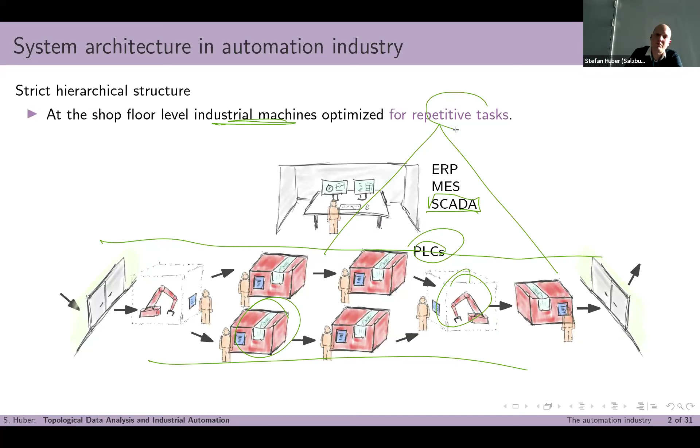I tell you this in order to draw a picture of the following situation: these industrial machines are very hierarchical and optimized for repetitive tasks. An injection molding machine, for instance, repeats itself in its operation to produce goods in the same way, in a cyclical sense. Highly repetitive.

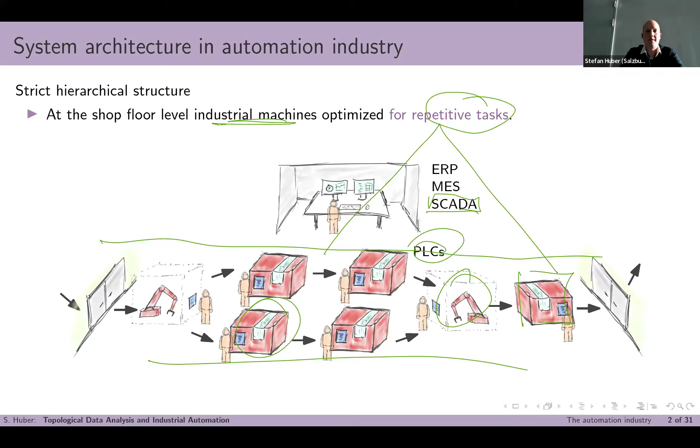In so-called discrete automation, as I explained, it's about repetitive processes. This is an old slide of mine now, 3 years old, always bring the same slide, which tells the following: if you consider the state of a machine, whatever that means to you, like 100 parameters describing what state the machine is in right now, let's call it the state vector.

If you consider the state space, which could be 100-dimensional or 1,000-dimensional, then the state performs an evolution over time, traces out a trajectory, the state space trajectory. And those are cyclic due to the repetitive nature of discrete automation processes.

Or at least in a certain subspace they are cyclic. That enables us, at least in principle, to record such a time series, such a trajectory over time, where you capture a couple of repetitions and then model it through machine learning - a statistical model, the distribution of state space trajectories. Those trajectories are then typically contained in some hose, might be narrower there and wider there, doesn't matter so much. This is sort of the hose of benign state space trajectories.

That leads, I would say at least at first, to 3 fields of application we're interested in. It leads to anomaly detection, which essentially means if you leave this hose of benign trajectories, this is an anomaly. Or maybe put more in a probabilistic sense, if you have a PDF density function of the distribution, then a low likelihood indicates an anomaly.

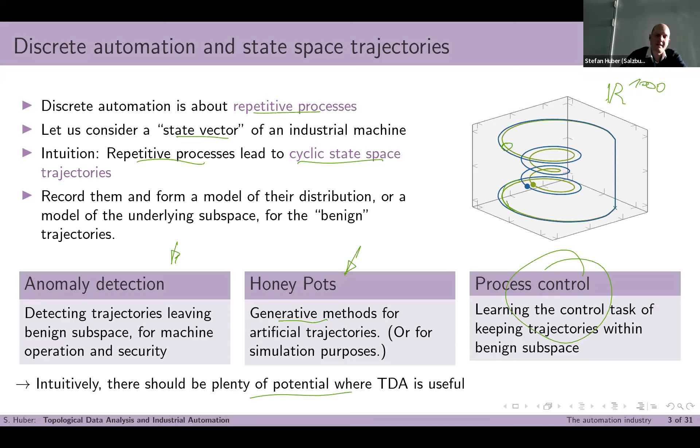So that's sort of the setting. This is what we did the past 2 years, 2.5, almost 3 years. Within this time we also built up a whole testbed, a realistic testbed of a production scenario. Here we have 3 such machines, which are injection molding machines, and 3 robots that take out the goods, put them on a conveyor belt, and a 4th robot palletizing them, and so on. And we implemented that with real hardware.

What's not real in our case are those machines, actually. So we simulate the thermodynamics, the material flow, other physical processes are simulated, but the controllers, the software, and so on, this is all real, and we use hardware-in-the-loop simulation for the physical processes.

That was quite some work by a couple of people in the last 2 years. And this was possible because we are a very interdisciplinary team and have very close cooperation partners, company partners, and it enabled us with software and so on.

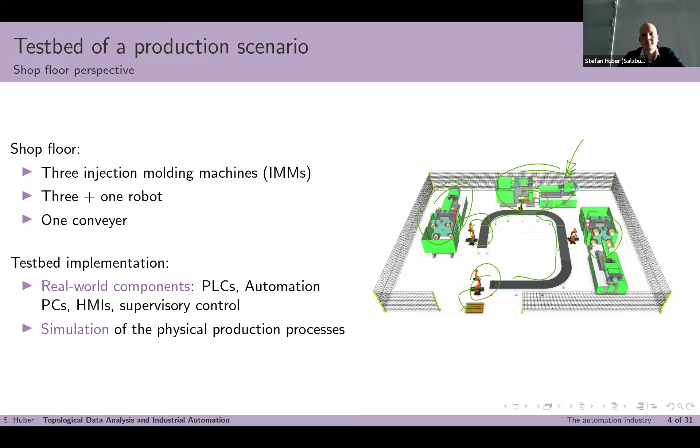So this is sort of the context I want to give you. Now the question is, are there TDA applications in manufacturing, or how do they look like?

To this end, we published a survey last year together with the group in Graz, Michael Kerber. Barbara was also part of this group back then; she later moved to the University of Albany. Martin is a PhD student in my research center. The title of this survey is TDA in Smart Manufacturing.

So what we did is the following: we performed a systematic, exhaustive literature review. We defined a set of keywords that captures what we call TDA, topological data analysis, UMAP, mapper, and persistent homology.

And we defined a set of keywords that sample the shape of industrial manufacturing. Today everything is smart, so we find a lot of literature on smart manufacturing, so you better add it to the keywords, like factory automation, operational technology, industry 4.0, and so on. So these are the keywords, the domain and the method side.

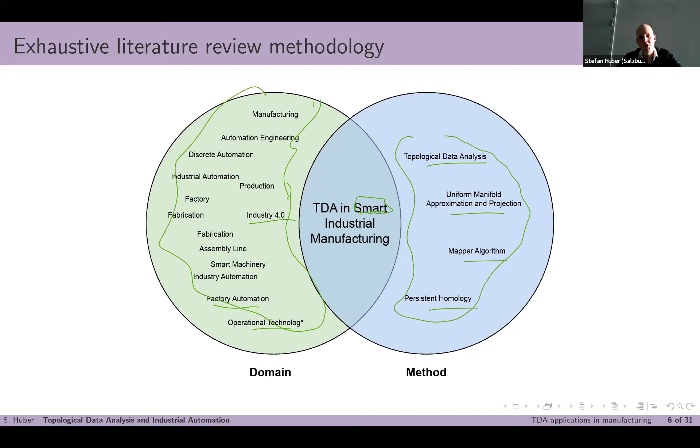The intersection sort of shapes TDA in smart industrial manufacturing. Then we formed search phrases of the form domain and method, plugging in domain keywords and method keywords in all combinations, and passed them through 5 search engines, ACM, IEEE, and so on. We got 7,000 results.

Those were then filtered, removing duplicates, only focusing on peer-reviewed journal and conference papers, only in English, only where full text is available, so we could dig into the material and check whether the context is actually right. That gave us 34 results at the end.

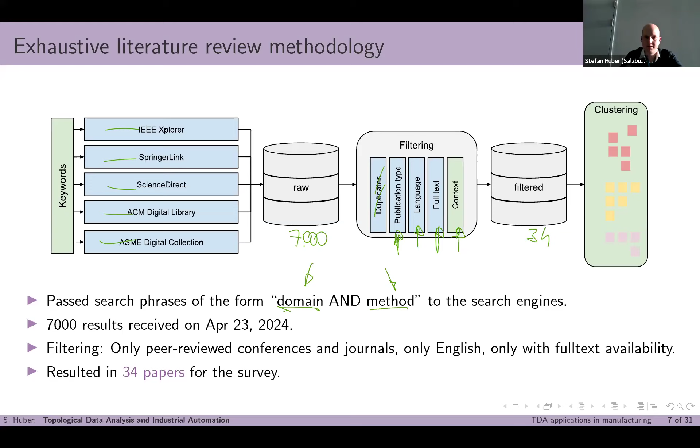With those results, we did some analysis. First of all, we found that they're arranged into 3 clusters. There is a first cluster, cluster A, about quality control on the product level. Here TDA is used to analyze deficiencies in the shape or the textures or the surface, something like this.

There's a next cluster about quality control on the process level - not the product that is produced, but the process that is producing the good. Like using it for detecting chatter in NC machining, so vibrations in the machine and stuff like this.

The third cluster is actually about manufacturing engineering - the engineering discipline that allows you to build machines, production lines, and processes. So about scheduling problems, process optimization, predictive maintenance, and stuff like this.

This was actually the largest cluster with 13 papers. Then there was quality control on the product level with 12 papers, and another cluster with 9 papers for product and process - no typo there.

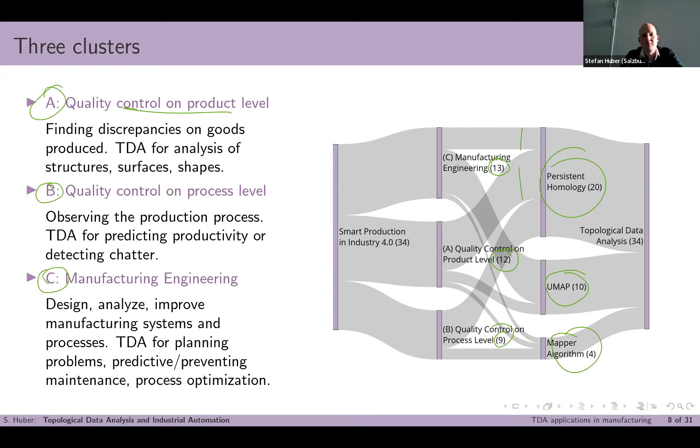Here we have our 3 methods - persistent homology, UMAP, and the mapper algorithm - and those are now related to the clusters. The thickness of the bar tells you how many papers there are. The largest method cluster was persistent homology. Okay, so far so good.

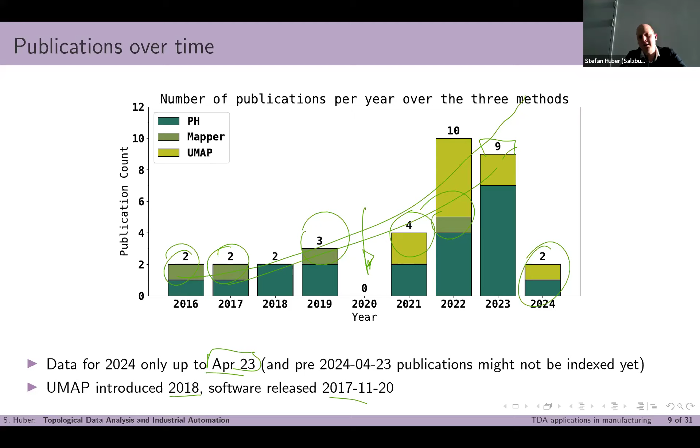We could speculate whether this is maybe due to patenting issues or what the reason might be - it's unclear. This is probably due to the COVID pandemic. Yeah, speculation. Another thing we looked at that I find interesting is the data on which those methods were applied.

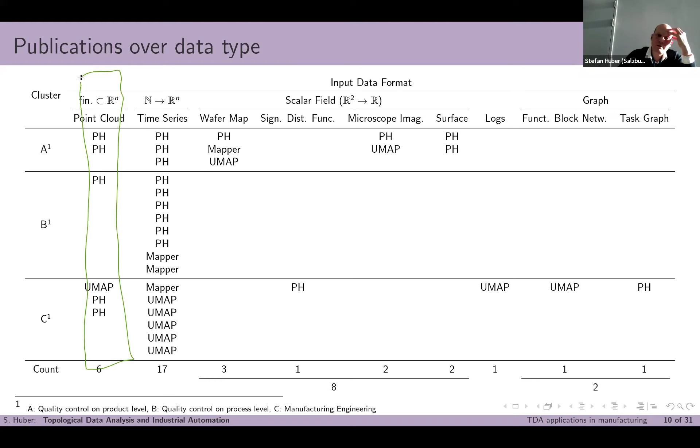This is to be read as follows: here is the column of point cloud applications, a finite subset of R^N. In cluster A, we have 2 works where persistent homology is applied to point clouds, and it's applied to a certain variety of data.

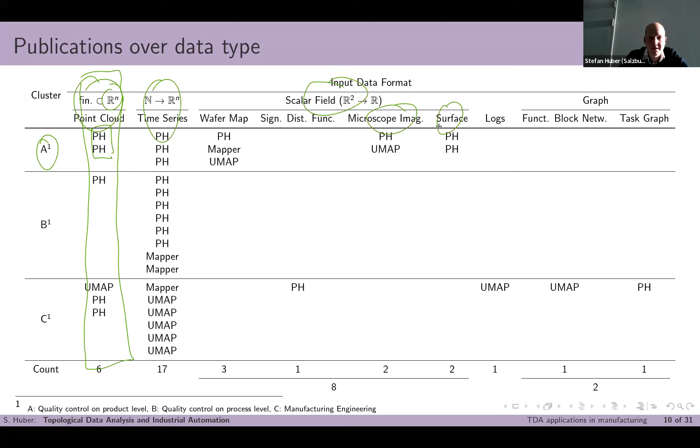So point clouds, time series, scalar fields in different forms, like microscope images of surfaces, or silicon wafer maps, something like this. 2 works where graphs are the underlying data, and 1 work where textual data, log books, log files were actually used with UMAP as the method.

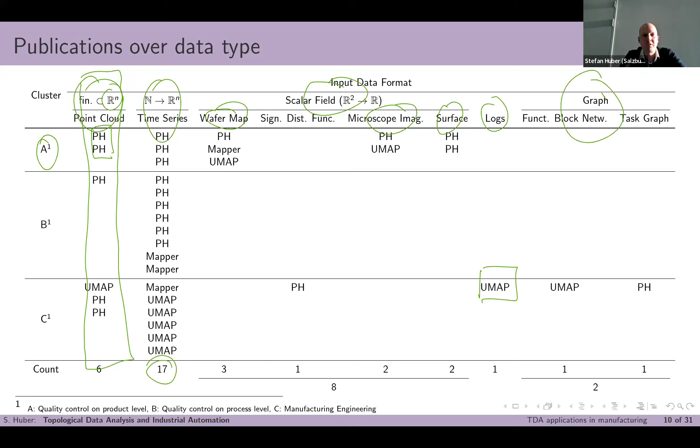So what we see here is 17 out of 34 works are concerned with time series - it's the most popular input data to TDA methods. Okay, so I don't want to dig too much into that and waste time here.

So a quick summary of this larger survey: the number of applications is quite low when you compare it to biology or medicine. Just go on the donut database by Barbara and so on, and you will quickly see that the number of applications there is much higher.

Secondly, the most prominent data type is time series, and there are a few other findings, like mapper is underrepresented. There's actually no UMAP application for quality control on the process level, which is probably a research gap here. Persistent homology and UMAP are used on a diversity of data types, but mapper only on time series, with 3 works, and 1 exception, scalar.

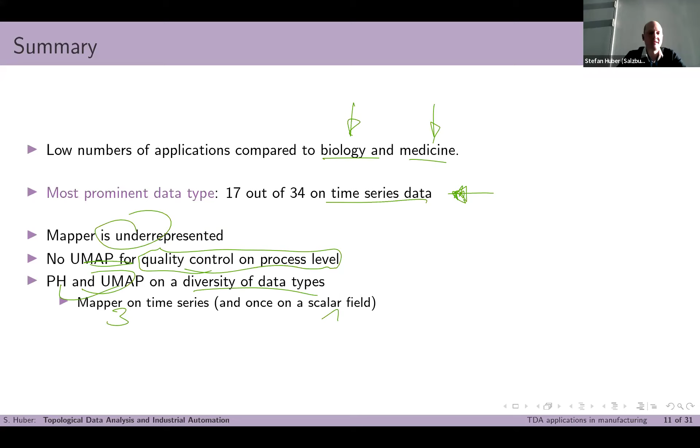Okay, so I want to focus on the time series thing. And the question is whether this is to be expected or not. I think it is to be expected.

Let's have a look at industry. I think the key scientific disciplines in industry are physics, and there it's mostly mechanics, electrodynamics, and thermodynamics, maybe also optics and acoustics. The 3 dominant ones are mechanics, electrodynamics, and thermodynamics, in my opinion. Then we have electrical engineering, control theory, and signal processing, and these, I think, are the fields you erect industrial automation on top of.

That's it. And those fields are about differential equations, time varying values, signals, and so on. It's in their very nature. So we could summarize it as follows: in my opinion, industry is about studying, controlling, and designing dynamical systems and processing signals to the end of controlling dynamical systems and studying them.

So when we ask how TDA is useful, I think we should ask how can we leverage TDA for time series, which comes in the form of signals or trajectories, and how can we leverage it for dynamical systems. And this is essentially what we did in the last 2 years to some extent.

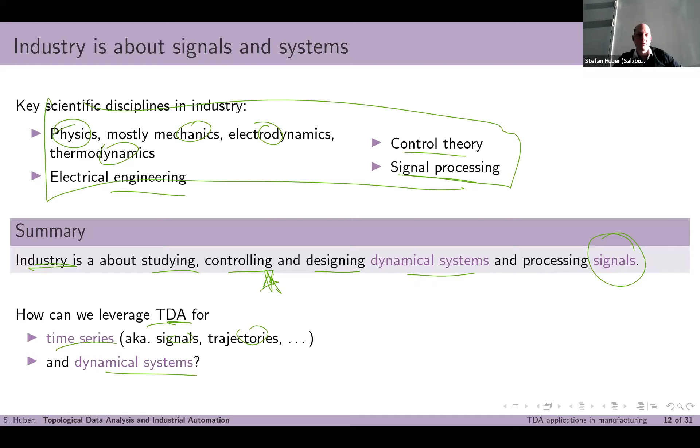So one work I want to report on now is about learning dynamics with persistent homology. And in control theory, we would phrase it differently: there we would say how to perform system identification with persistent homology.

Okay, so this is based on a paper we did last year, NeurIPS 2023. This was mainly driven by Roland Kwitt's group with Florian Graf and Sebastian Zeng, who was a PhD student back there. Florian Graf is a postdoc. Sebastian then joined my research group for a year, and we collaborated very closely, and now he is in Sweden.

So what did we do there? The problem formulation is as follows: consider a dynamic point cloud, and assume it is governed by some parameterized dynamic system. So you have a few parameters that change the behavior of the dynamic system. And if I give you a finite number of observations, a finite number of point clouds, can you tell me what the parameters of the dynamical system were? What were the values? That's the problem.

And applications would be, there are a ton of applications in biology, like bird flocking and fish movements and insects, but also cell motions in biology or particle systems in physics, and so on.

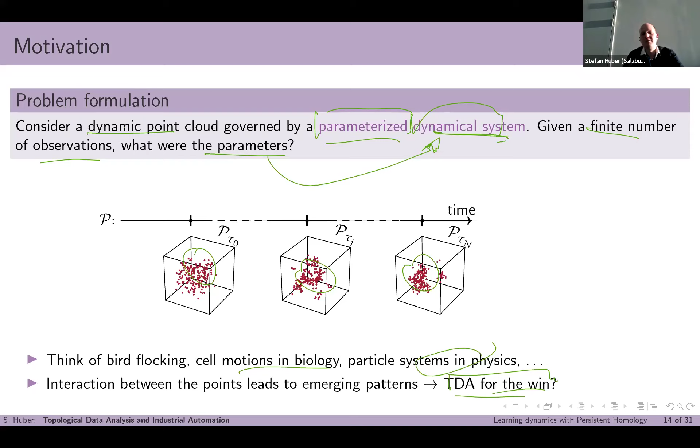And one observation here is that these dynamical systems, so the laws of motion that are somehow incorporated here, they lead to certain geometric patterns emerging due to attraction, repelling behaviors, and so on. So TDA should be useful, and it is, and it has been used before. So this is not the first work on this, by far not. But we could improve the state of the art, and I will tell you how.

So maybe let's formalize the problem a little bit more. We have a dynamic point set, P of T, finite point set, in Euclidean R3, T is the time parameter. And that means for us the following: let's say this point cloud contains m points, and the xi as a function from R to R3 are curves, trajectories. They are the trajectories of the ith point.

Dynamical system now means the following: the velocities of the points are controlled by a function f with parameters p that gets as inputs the points and the velocities, and outputs the velocities of the points again. So this governs the motion and the evolution of the point cloud. This is the dynamical system. So f is the dynamical system.

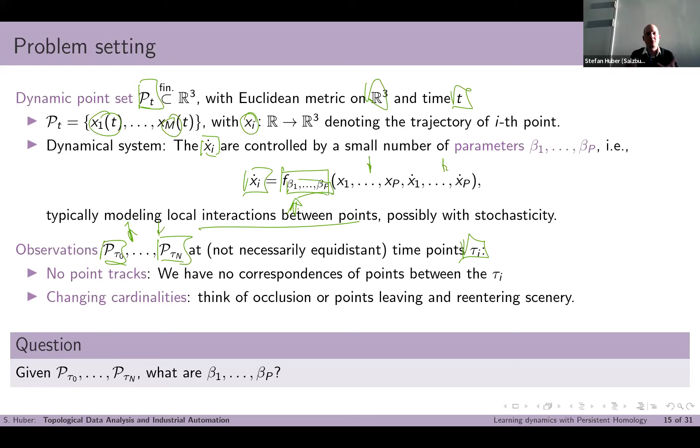And maybe you will also add some stochasticity, like Brownian motion or something. So what you get are now observations, P of tau 0 to P of tau n at some time points tau i, which might not be equidistant. It might also be that the cardinalities of the point sets might change - think of some occlusion, or some points leave or re-enter the scenery you're investigating.

You also don't have the correspondences between the points. You don't know how the points move. You only have the point sets, no inter-correspondences.

The question is now, given those point sets P, can you tell me what the betas were? What we did is the following.

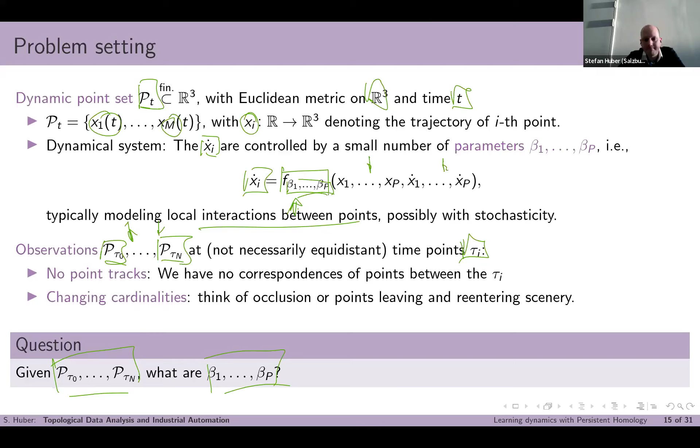Over time, you have these observations, and the first thing you do is vectorize the point clouds. One thing you could do is use PointNet++, a neural net, which gives you an output vector from the neural net as a vectorization.

Another thing you could do is consider Rips filtration, maybe the H0 diagram, the zeroth dimensional persistent homology diagram, and vectorize it somehow. We used the paper of Hofer et al. That also gives you a vectorization, and you can stack them together, which is our joint version.

This gives you those vectorizations. Every point cloud gives you a vectorization. So what prior work did a lot was investigating the dynamics of this vectorization. But this is not what we do.

We do something different. We assume there is an underlying latent space where we could actually investigate the dynamics. So let's say you can map this trajectory of the dynamic point cloud into a latent space, and then this P of T becomes a path Z in the latent space, some latent path z.

And you can sample it at instances of time. So Z of tau 0 would be the encoding in the latent space of V of tau 0, and so on. And then what we do is the following.

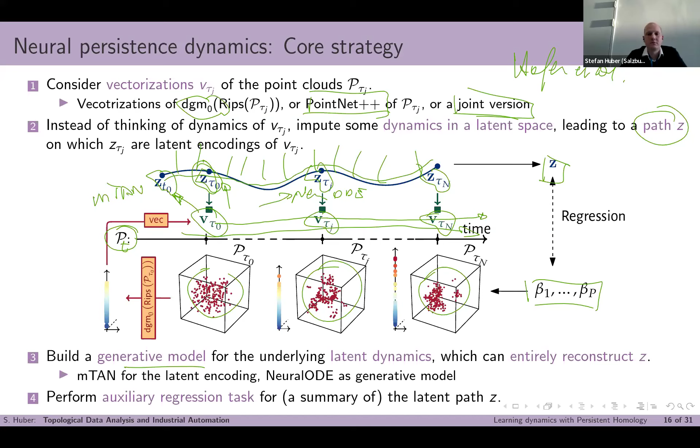Then you set up the auxiliary regression task, and that's it. That enables us to beat the state of the art.

So we tested it on 3 data sets. 2 are mentioned here in this table, the D'Orsogna and Vicsek. These are some particle systems, each governed by 4 parameters, beta 1 to beta 4, so to say.

And we checked it against the prior state of the art, which was path signature kernels and Crocker stacks. And we checked against 2 evaluation metrics: variation explained, which is similar to R2 in regression tasks, and SMAPE, which is sort of down to the regression task.

You measure how far the real betas were away from the betas you predicted, and then you have to scale it because the scales of the betas are different. This essentially gives you the SMAPE metric, so to say.

So SMAPE should be low, and variation explained should be high. You want to explain a lot of the variation of your results with this model.

In any case, we're able to beat the state of the art, so we outperform it. We also scale a little bit better if observation sequences are high compared to Crocker stacks. We perform much better compared to the path signature kernel, I don't know, like a factor of 3 better or so.

We also did a bunch of ablation studies, not mentioned here, but for instance, we had one study where we checked that persistent homology actually gives you complementary information.

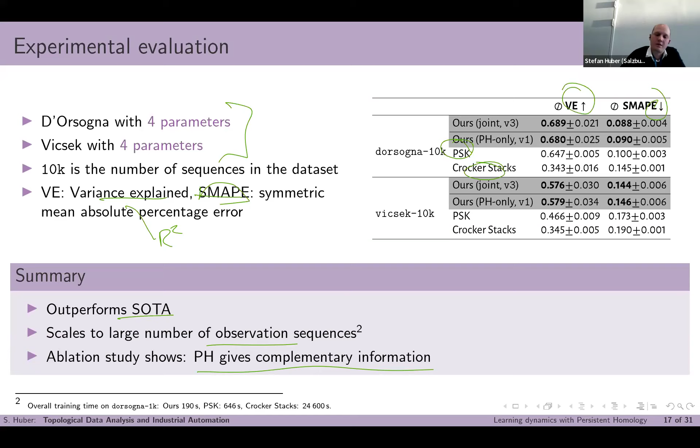So this is about point clouds, but where's the industrial automation here? I think this method, this idea, has potential to be translated to automation industry. The assumption is the following: consider an industrial machine, a production line, or a whole factory.

And then I think it's fair to assume that it can at least be sufficiently modeled by a dynamical system. And this dynamical system again depends on some parameters, let's say some friction parameter or some value that tells us something about thermal conductivity or something like this.

And you have observations of the system. So the rough setting is, again, you have parameters that influence the system, you get observations, and you can predict the parameters again. So, next assumption.

Say you have an anomaly that is caused by some parameters having changed, like the friction parameter increased, and this is anomalous. Then the technique from before sort of gives you the ingredients to do the following.

You simply estimate the parameters, and when there are deviations, you don't only have the signal that there's an anomaly, but you can also name what the root cause was, like it was beta 17 that changed, something like this. So this is sort of the motivation why we are interested in neural persistence dynamics.

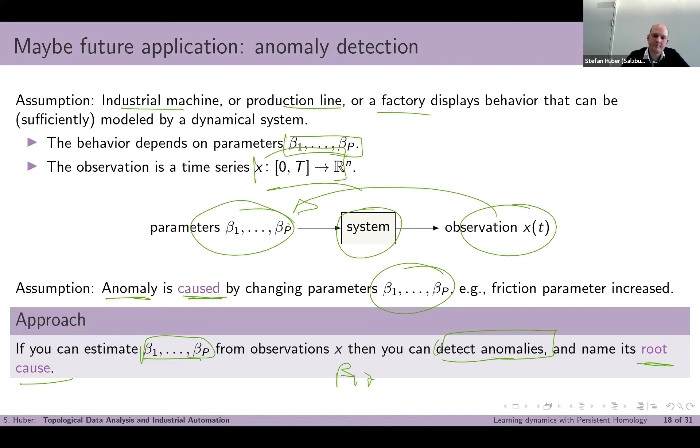Okay, another thing I want to talk about is multivariate time series using persistent homology. Very often you come into the situation that you want to process multivariate time series. One standard problem is the following.

Assume we have such a time series X, which I formalize as a map from an interval to R^m. Let's say it's from a machine of discrete automation, so you have cyclic behavior. The question is, how can you decompose this interval into its cycles, so to say?

Into its repetitions of this repetitive behavior. Meaning, you want to find what T0 till Tk were, such that the intervals Ii formed by Ti-1 till Ti are the cycles of this repetitive behavior. The tau_i, as the length of the interval, would be the cycle length.

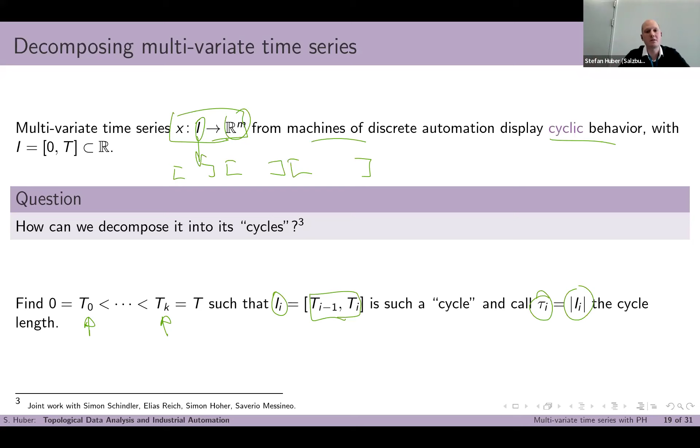Very natural to ask this, to generate some data sets, or to ask whether the last repetition was anomalous or stuff like this. The only thing is that you actually have different notions of cyclic behavior if you look at this.

It could be that machines have varying speed, so you sort of break the notion of periodicity. It might be that machines have different modes of operation or other abnormalities, so in the state space you have some forking behavior, so to say. It's clearly not periodic.

And the notions we introduced are three: periodic, which is the one we know from school, like it really repeats itself in a periodic sense. We have repetitions, where you also accommodate for reparameterizations within a cycle.

So the machine could stop, accelerate, and so on, but in the state space the geometry stays the same, the image of the curve remains the same. The third notion, the most general one, would be recurrent.

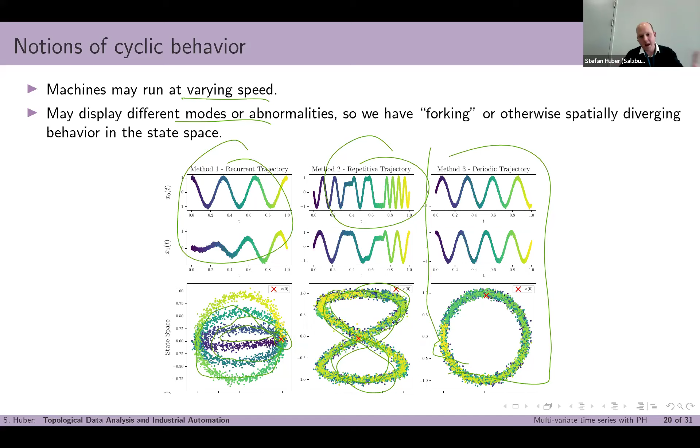Like you have a point that you revisit all over again, where your production cycle starts. But on the way, it might have different ways to proceed. It comes back to a first state all the time. And you can formalize this more mathematically, of course.

So we call x periodic if x(t+tau) = x(t) for all t. And in our notion, all ti would be the same, namely tau.

And there you have the machinery of signal processing from the past 100 years, like Fourier transform, autocorrelation, Laplace, and so on and so forth.

We call x repetitive if for every such cycle you have essentially a reparameterization gamma from the ith cycle to the first cycle, such that if you compose x with gamma, you get x from the ith cycle mapped to the first cycle, more or less. So this allows for this reparameterization per cycle.

And the third notion would be recurring, where we simply say every time you revisit x, so x(t) becomes x(0), you consider the kernel of x minus x(0); this gives you the set of the ti's, so to say.

So this allows for variations in the image of x, like different production modes. Or, if you change the friction a lot, you probably have some shifts in state space, something like this. But that doesn't suffice.

You have data here from the real world, you have measurements, noise, or other deviations. So you need some approximate notion too. In our case, we say x is epsilon-approximately periodic or repetitive if there is a periodic or repetitive x-hat that is close to x.

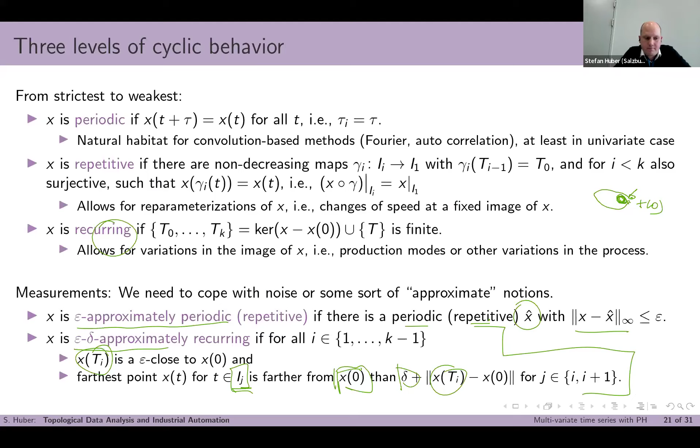Sure. For the last definition, why do you need the point to be away delta? Like if I just drop this, it would still be a good definition. I would still be repetitive if I have something like this. I don't understand why I need this. So say, because if it's just noise, I just stay there, right? And then I can choose any t there, and it would be a good point of repetition. You get sort of fake repetitions, right?

You want to have something like: this is your first repetition, this is your second repetition, this is your third repetition, and so on. If you add noise now, then once you cross close to x0, it might be that you get very small cycles that just escape the epsilon vicinity, but only a little. And you don't want to count this as a full repetition. You want a whole production cycle to express itself as leaving the start state significantly.

Otherwise, you simply stayed within the vicinity of the start point too much, so to say. Did I make it clear sufficiently? I understand what you want to model, but maybe I don't understand where this is going, or why this is needed. Because to my eyes, if this is noise, it doesn't really matter that I went away. I might as well stay there. And then all of these points on the small loop are good recurring points because I'm just still there.

I didn't do anything. Later, when we compute somehow, for you it makes a difference if I leave a bit, as in, oh, I leave, so I'm not there anymore. But I didn't leave enough, so I also don't want to count it. That's somehow two different ways of leaving. One is good enough for you to start a new cycle, but the other one is actually not good enough to start a new cycle, but it's good enough for you to say this is not a recurring point. And this is the discrepancy I don't understand. How can it be something sort of in between there, good enough for one, but not good enough for the other?

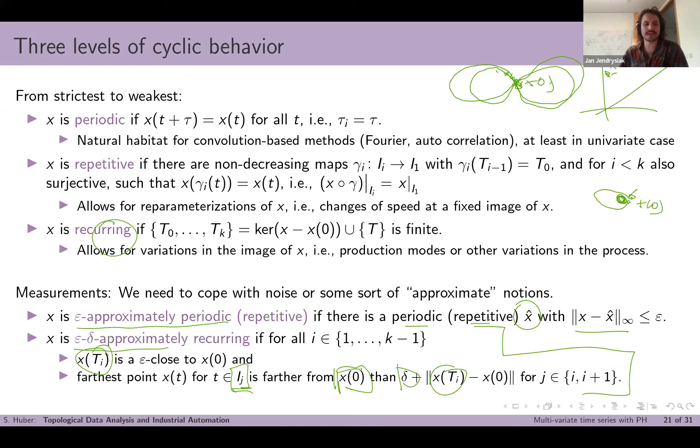Good, you're welcome. Method one is the most general one. There, you see the answer sort of already. So let's say you have such an X, which is epsilon-delta approximately recurring. Then the method we propose is sort of a baseline method, you could say, maybe the simplest you can think of. You consider a surrogate function v of x that simply measures how far x of t moved away from x of 0 — the norm of x of t minus x of 0.

And this is plotted here. You are interested in the local minima that are close to 0, but still have sufficient persistence. If the surrogate function looks like this, you want to drop them because they are not fully featured repetitions — not persistent enough, not significant enough. It's sort of a design decision in the modeling.

So you take the surrogate function, consider the sublevel set filtration, and compute H0, which gives you this persistence diagram, the zeroth diagram. Then you're interested in the points where the birth level is at most epsilon, so you get close enough to the starting point, which means this area, and where the persistence is at least delta. So you don't care so much about points down there, but which are sufficiently persistent — this would be the intersection area. These are fully fledged repetitions because they left the starting point sufficiently using this notion, and they came back to the starting point sufficiently using this condition. That's the idea, and so the t_i are those local minima identified here.

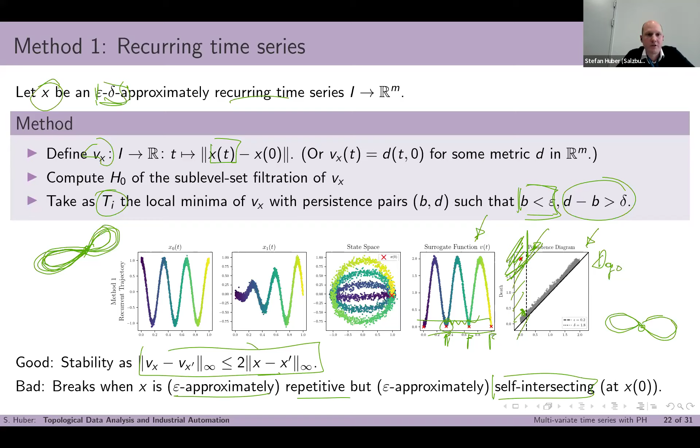Which brings us to method 2. Let's say X is an epsilon approximately repetitive time series. What we now do is the following.

When we have such figure 8 shapes, we need to disentangle, when we approach a point, whether we came from the bottom or top half of the figure 8. You could do it by considering slopes or differential quotients, but I think the more natural and stable way is to take an embedding, a time delay embedding. So we consider another function, u of x, which performs the time delay embedding, t mapped to x of t plus delta, and so on, for a certain embedding length, which disentangles these ambiguities at self-intersections.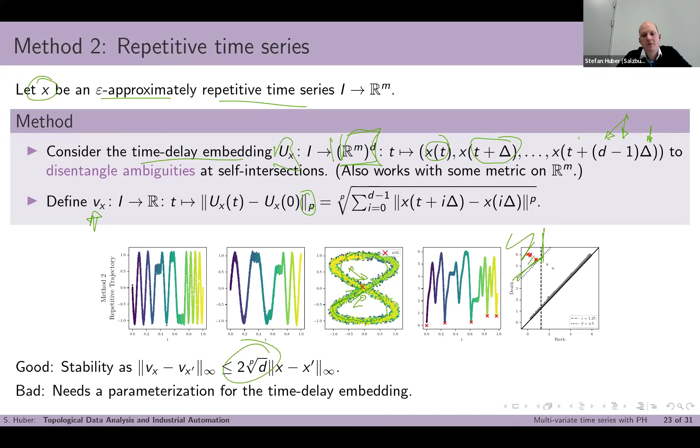And it might be unclear how to do that. You could come up with some heuristics, or think of another method. This is what we did: method 3. We have another method, but now we require more structure on the time series.

Namely, we consider epsilon approximately periodic time series. The idea for method 3 is the following. Before, x0 was sort of a pivot element; we all related to x of 0 when this reoccurring happens. What about considering all possible pivots instead?

Or in terms of a time delay embedding, you have a holistic time delay embedding where the embedding covers the entire time series x. So we become independent of the choice because you covered everything. That means the following.

In other words, we consider the recurrence function, which is related to the recurrence matrix, dynamical systems, and so on. So a function w of x, where you plug in pairs of timestamps and compute the pairwise distance in your Rm.

What we then do is again construct the surrogate function, but we average along fixed time delays delta. So the surrogate function at delta is the recurrence function at t and t plus delta, averaged over all t's. That smoothens out stuff, and we consider all possible pivots x0 this way. This again gives us stability by this chain of inequalities.

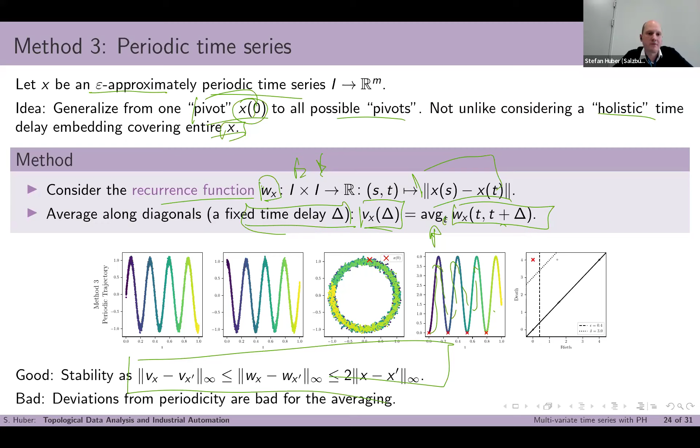So maybe some summary, maybe some evaluation. We generated data sets - there are no such data sets readily available, but we can generate one because we have this testbed. We generated a multivariate data set from an injection molding machine.

We have some 4.15 million samples, 23 variables recorded, displaying a production process with cyclic behavior. Each cycle comprises 25,000 to 35,000 samples, with a sample rate of a kilohertz, so per millisecond we have a sample. And we designed the data set so that this periodic, repetitive, recurrent behavior is displayed.

In total, the data set comprises 120 cycles, grouped into 18 modes of operation. There are 20 cycles showing periodic behavior, then another 20 cycles, so 2 times 20 cycles, showing periodic behavior plus noise.

Then we have 10 groups of 5 cycles where we vary the injection speed, plastification speed in the injection molding process, or the clamping of the tool is delayed, stuff like this. And we have another 6 groups per 5 cycles, another 30 cycles, where we increased friction and so on, which leads to recurring behavior.

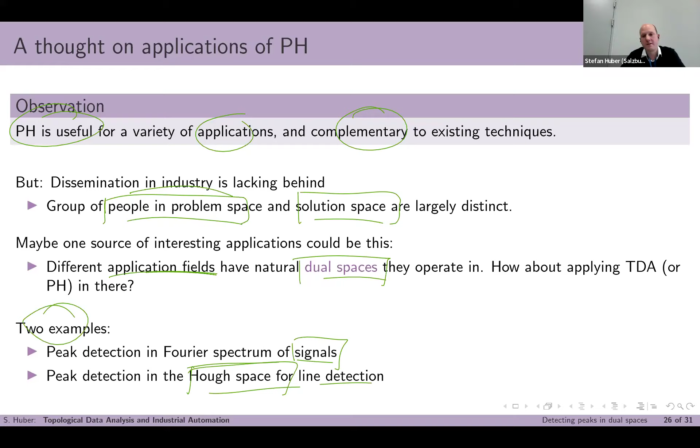Peak detection in Fourier spectrum in signals, and peak detection in Hough space for line detection. The first thing goes very quickly. I did that actually when I was in industry - I was in industry for 5 years and then moved back to academia. And there a colleague had the following problem: in closed loop control theory, in particular in motion control, we want to do controller tuning, tune the parameters of the controller. In order to do that, we need to know the natural frequencies, the resonance frequencies of the system that is controlled.

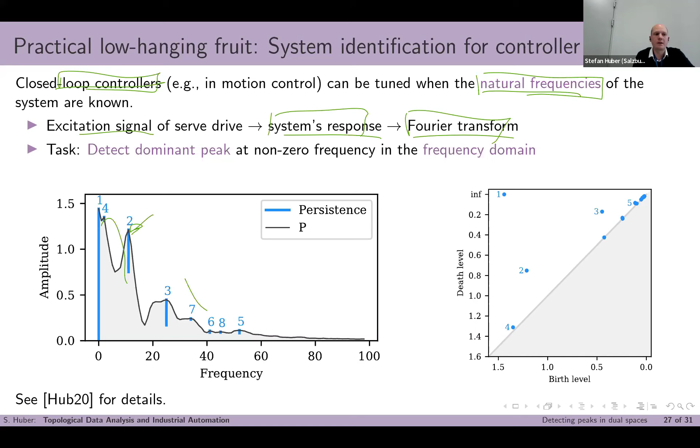So what's done there is the following: you have an excitation signal at the drive, at the motor, you get some system response. You consider the Fourier transform, which looks like this, and you want to identify the most significant peak, which is easy with persistent homology and very difficult if you don't do it like this, because then you add all sorts of heuristics and smoothing and so on. This is what I did there. This was a low-hanging fruit, and it's super performant - in n log n, it's done.

Another example is the following: Hough transform. This is something we submitted these days, yeah, I dare to tell you about this already. Hough transform is a technique in pattern recognition, computer vision, to detect lines in images or in point clouds. It also works with a dualization. It does the following: you can parameterize a line in Hesse normal form, like distance to the origin, orthogonal distance to the origin, and the angle by which the line is rotated. This gives you, so to say, the Hough space of lines, the space of parameterizations of all possible lines.

When you consider all lines through a single point, you get in Hough space such sine functions, like the set of lines through this magenta point is a set of points in Hough space forming the sine. And you can do this with all 3 points. And the intersection in Hough space corresponds to the one line in common to the 3 points.

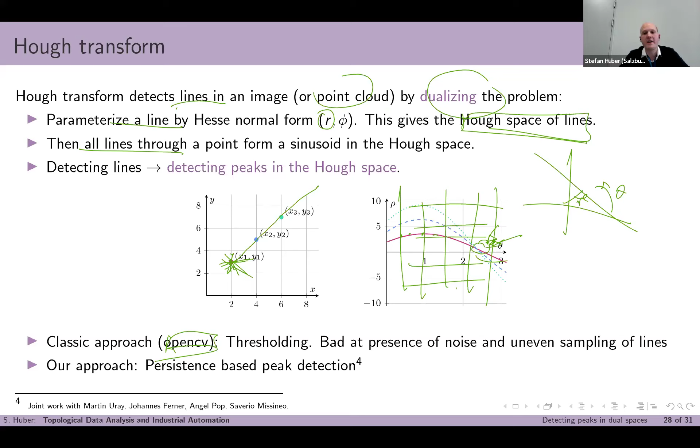So in an implementation, you discretize this, then you have some histogram, some voting scheme, and ask for the most dominant peak. The classic approach, how it's implemented in OpenCV, this is the standard approach, is thresholding. And that's bad when you have noise or uneven sampling of lines. And what we propose is persistence-based peak detection.

This looks like this: you have 2 lines here in the image space. They are sampled unevenly, and you add noise. And the Hough space looks like this - the set of all lines through all those points. And then you do some voting, you want to identify the most prominent peaks. The persistence diagram looks like this. So sorry, those axes are swapped.

The diagram is correct, but it's just an unusual way to display it. So what OpenCV does is, in this super level set filtration in the Hough space, is thresholding at the birth level, like this. And no matter where you choose your threshold, you won't identify only those 2 points, but you only identify this 1 point at this threshold, and if you lower it, you get some false positives.

And you add heuristics to remove them again, right? But the better idea, I guess, is doing the thresholding on the persistence, not on the birth level. But you only can speak about it once you talk about persistence diagrams, right?

So that's the idea. Okay, some final slide, my last slide. I think industrial automation is an important field for our society and our wealth. You have these industrial revolutions, the first, the second, and so on. Our modern society heavily relies on that.

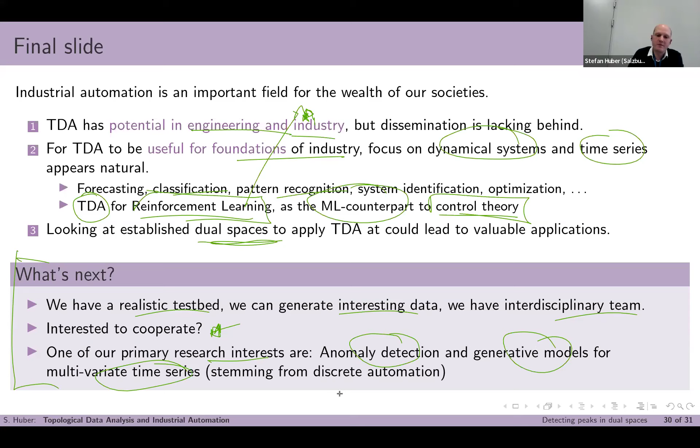Our primary research interest here, not entirely bounded to this, but this is our focus, is anomaly detection and generative models for multivariate time series and dynamical systems and so on, stemming from discrete automation. So we have this repetitive behavior. This is sort of our core, but we do all kind of stuff like Hough transform. And that's it. Thank you.

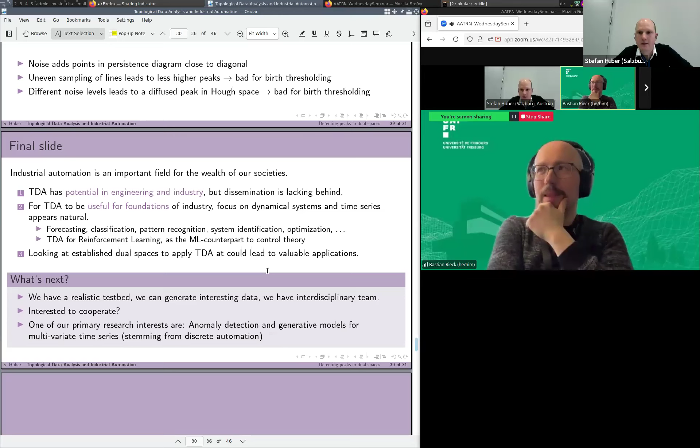Yeah, but very exciting stuff. So do we have any other questions towards the end? Maybe a short one.